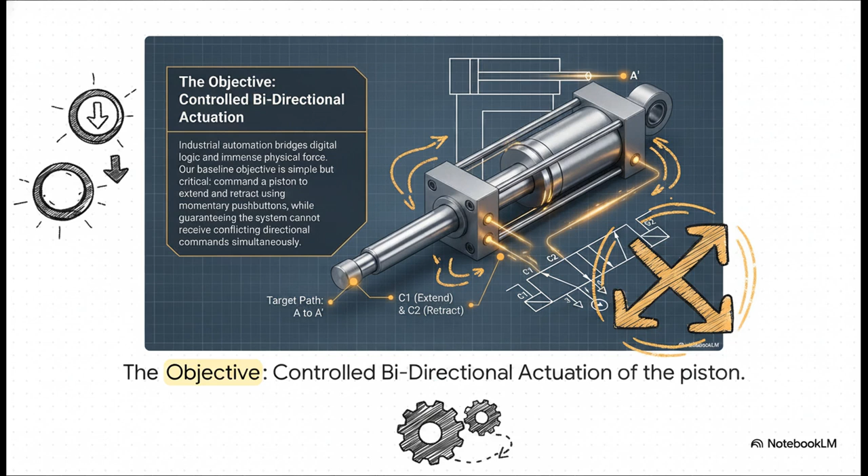Okay, let's dive right into our baseline objective. We need to command this massive metal piston to extend and retract safely from point A to a target, let's call it A'. Now the catch here is that we're using momentary push buttons. That means they only actually send a signal while your finger is physically pressing them down. And crucially, we have to absolutely guarantee that this system cannot possibly receive conflicting directional commands at the same time. I mean, if it tells the piston to push and pull simultaneously, yeah, things break. Badly.

So to actually move that heavy piston, we're going to need some serious industrial muscle. This usually means choosing between two different forms of fluid power. On one side, we've got hydraulic power. That's using thick, incompressible oil for extreme heavy lifting. And on the other side, we have pneumatic power, using pressurized gas or air for rapid, really high-speed cycling.

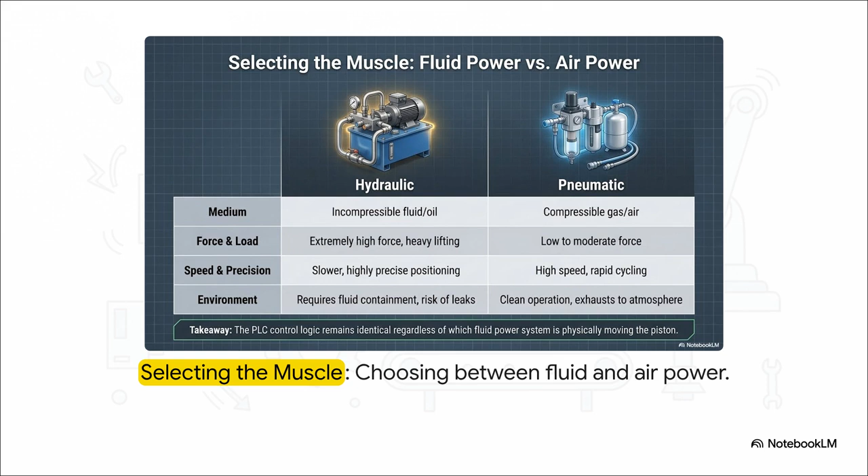Now here's what's actually really fascinating about this setup. We have these major physical differences, right? Hydraulics are slow, they can be messy, but they are insanely strong. Pneumatics are super fast, clean, but definitely weaker. Yet, despite all these extreme physical differences in force and speed, the underlying digital control logic, the brain we're about to build, is going to remain exactly the same regardless of which muscle we actually choose.

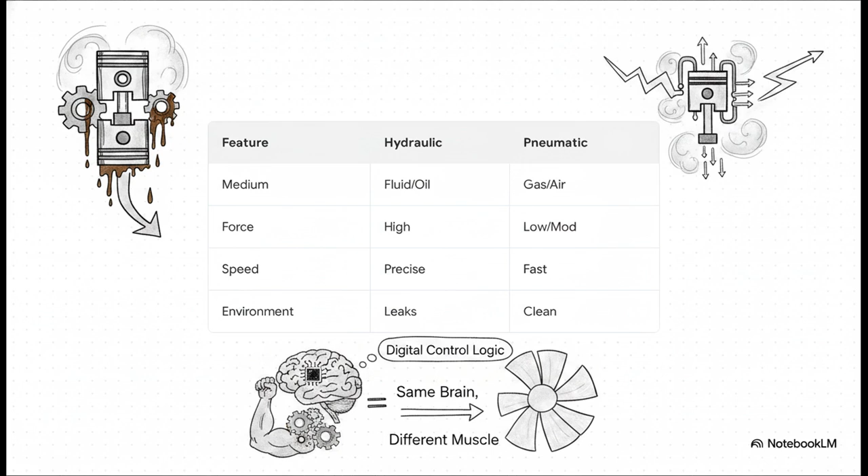But before we start flexing that industrial muscle, we have to build a safe nervous system. We really need to cleanly separate the electrical layers here. On the input side, human operators are interacting with a nice, safe, low-voltage 24-volt current. But the mechanical actuators require much heavier power to run. So the PLC, our programmable logic controller, sitting right in the middle, acts as this absolute barrier between the two. This is so vital because it shields our delicate digital brain from the high-voltage electrical kickback that inevitably happens when massive machines power down.

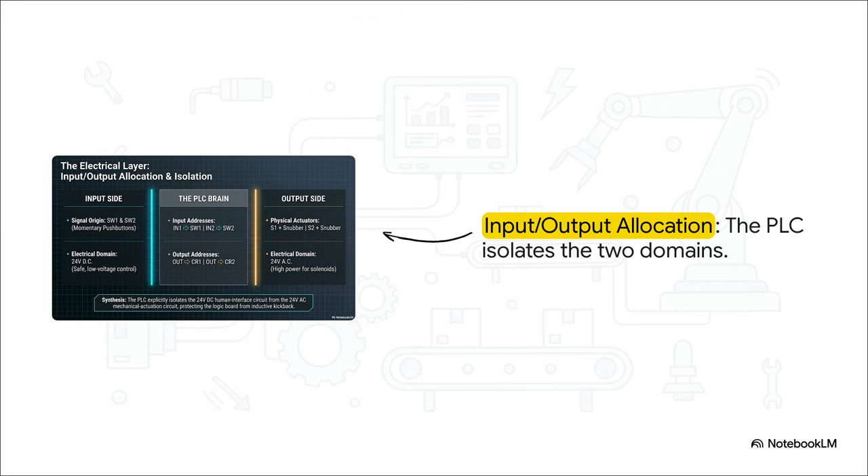So how exactly do we cross that gap? Well, we build a mechanical bridge using a 5/2 directional control valve. You can think of this valve as basically the ultimate translator between the digital world and the physical fluid world. On either end of it, there are these solenoids, which are essentially electromechanical triggers. They take that isolated, tiny digital whisper from our controller and they use it to unleash real physical movement.

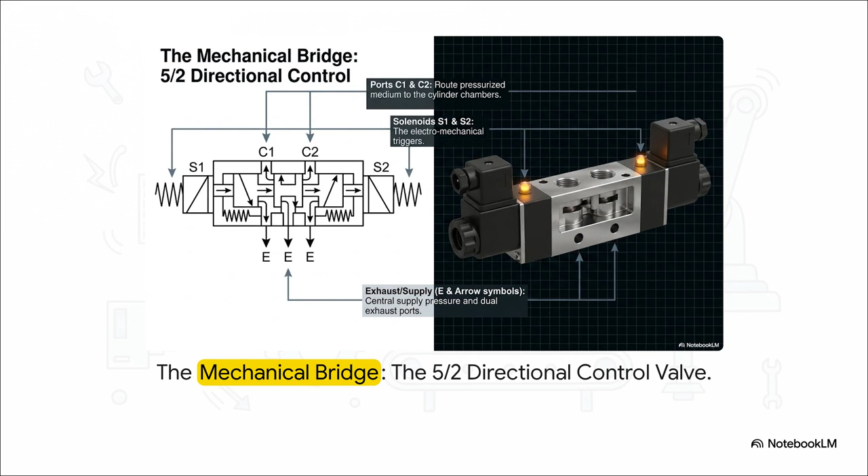Let's peek inside that metal block and witness what's called the spool shift. When one of those solenoids is energized with a current, it instantly creates a magnetic field. That invisible force then physically pulls an internal metal spool. And here's the crazy part. Just by moving that spool a tiny fraction of an inch, high-pressure fluid is instantly redirected, forcing the entire cylinder to move. We've successfully turned a super low-power electrical signal into immense mechanical action.

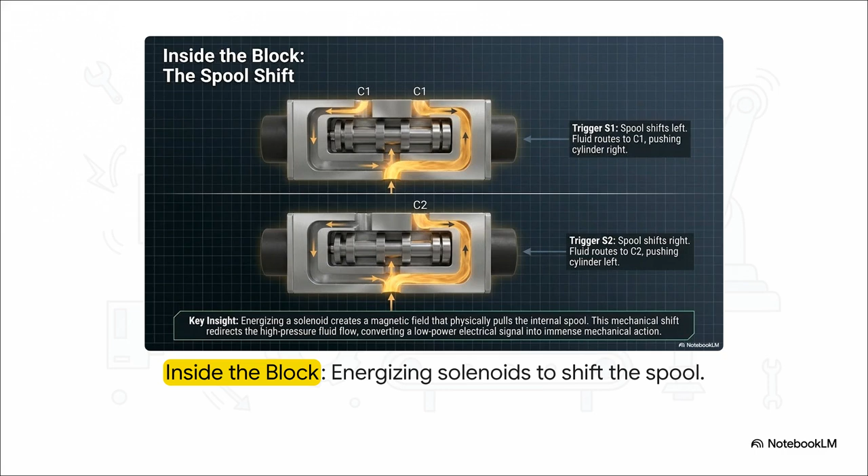Okay, so we've got our mechanical bridge and our fluid muscle perfectly set up. But here's the terrifying question we still have to answer. What happens if an operator panics, or slips, or just makes a really dumb mistake and presses the extend and retract buttons at the exact same time? Because with massive industrial pressures at play here, a conflicting signal could literally tear the machinery apart.

To keep our machine from literally destroying itself, we rely on the system's brain. And this brain is programmed using a specialized visual software architecture known as ladder logic.

It's called ladder logic because, well, it literally looks like a ladder. It's got these vertical power rails and horizontal rungs of code. But this code doesn't just passively read inputs. It isolates them, it quote-unquote remembers them, and most importantly, it uses mathematical interlocks to absolutely lock out those conflicting physical movements we were just talking about.

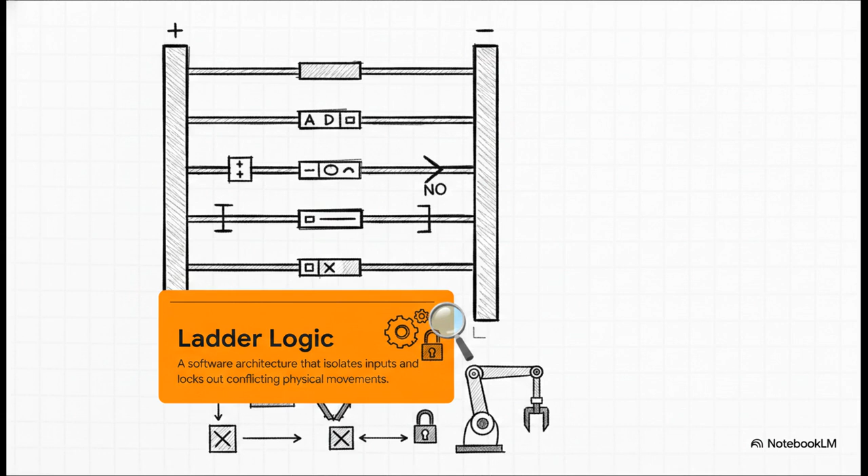Now this digital brain has a very specific puzzle it has to solve. Because our push buttons are momentary, the system has to somehow remember the command to extend long after the operator's finger actually leaves the button. And while it's remembering that command, it has to simultaneously guarantee that the opposite command is strictly locked out. We pull this off through two really vital code patterns.

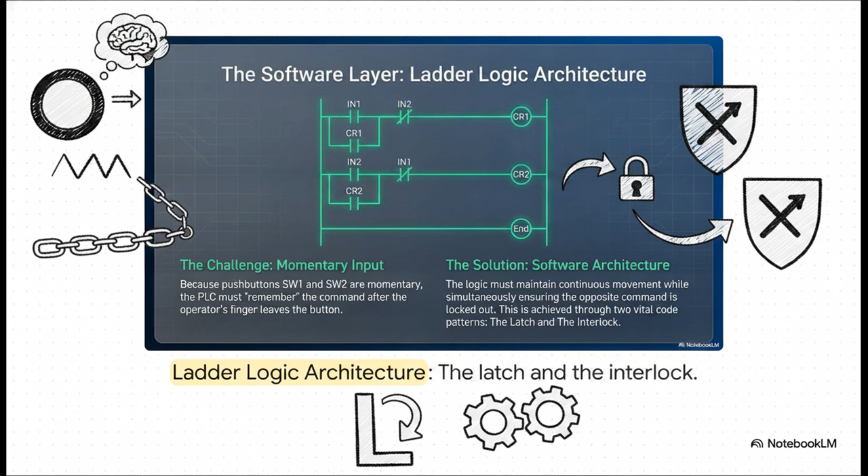Which brings us to our first brilliant solution, the latch. So when the operator presses the button, the signal reaches the output coil. Now here's where the magic happens. That output instantly closes its own parallel circuit, creating an OR gate. So now, when the operator releases the physical button, it doesn't even matter. The signal just bypasses it and flows right through the new path. The system has created a continuous loop. It has successfully remembered to keep pushing.

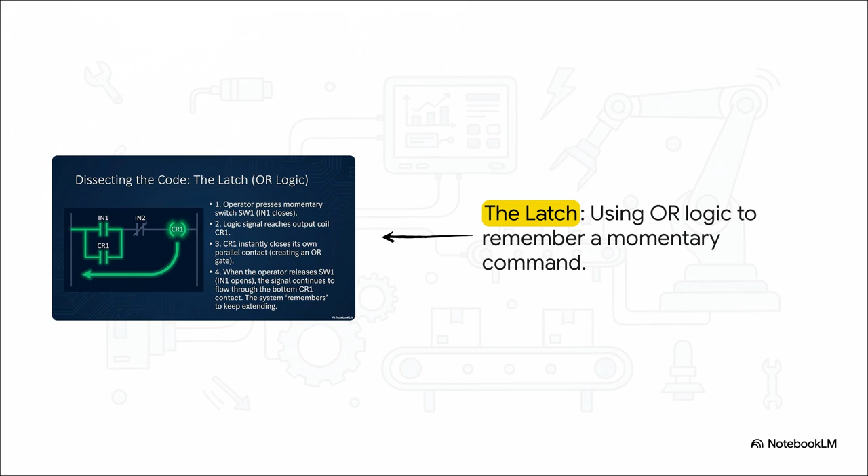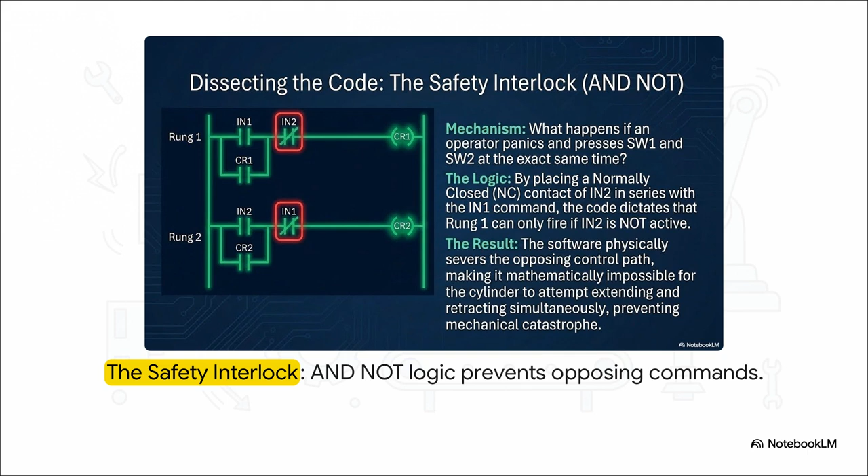Right. But what about our panicking operator from earlier? To completely avert a mechanical catastrophe, we deploy a safety interlock. We take a normally closed contact of the retract button and place it directly in the path of the extend command. This creates an AND NOT logic gate. By weaving the opposite buttons directly into each other's paths like this, we mathematically sever the opposing control line. The cylinder physically cannot tear itself apart, even if someone is literally mashing both buttons.

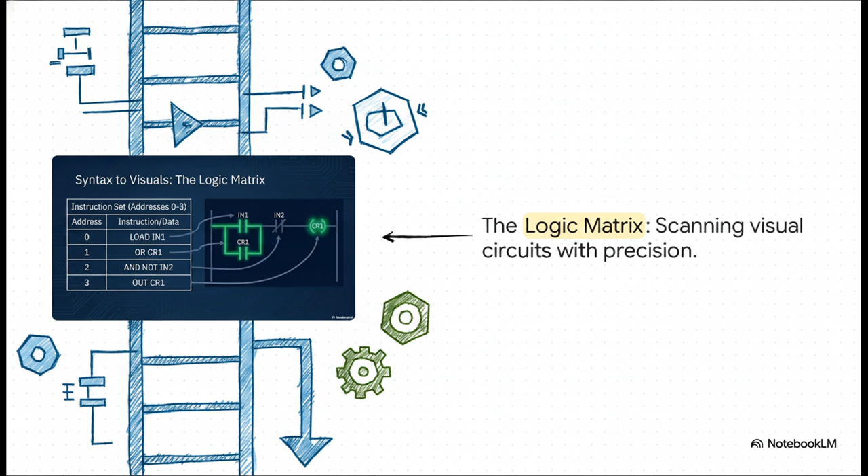Now, while we humans visualize this all as a nice ladder, the controller systematically reads these circuits as a high-speed logic matrix. It's processing this rapid-fire instruction set, loading the inputs, evaluating those OR and NOT conditions, and then executing the safe outputs. It scans this list from top to bottom over and over again, thousands of times a second, with absolute, unyielding precision. All right, let's watch this entire sequence rapidly come alive.

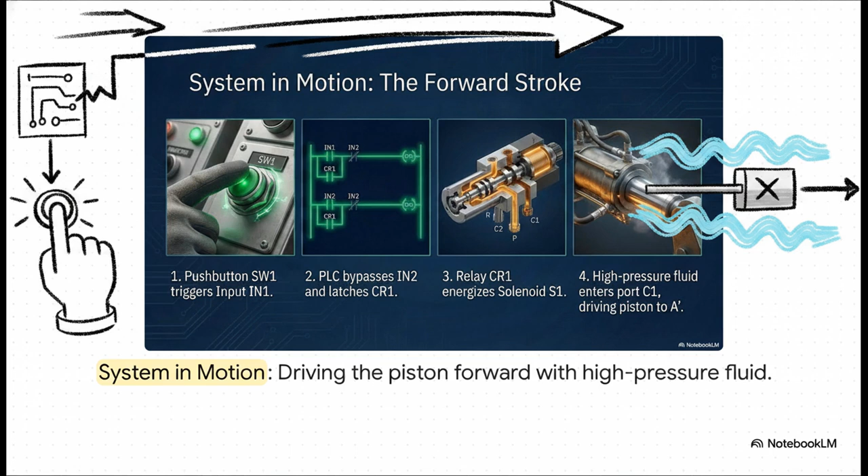Step 1, the human finger pushes the button, triggering that safe low-voltage input. Step 2, inside the digital brain, the PLC bypasses the interlock and latches the relay. Step 3, that relay sends a high-voltage signal right across the mechanical bridge to energize the solenoid. And finally, step 4, the spool shifts and high-pressure fluid aggressively drives that heavy piston forward to its target. Boom.

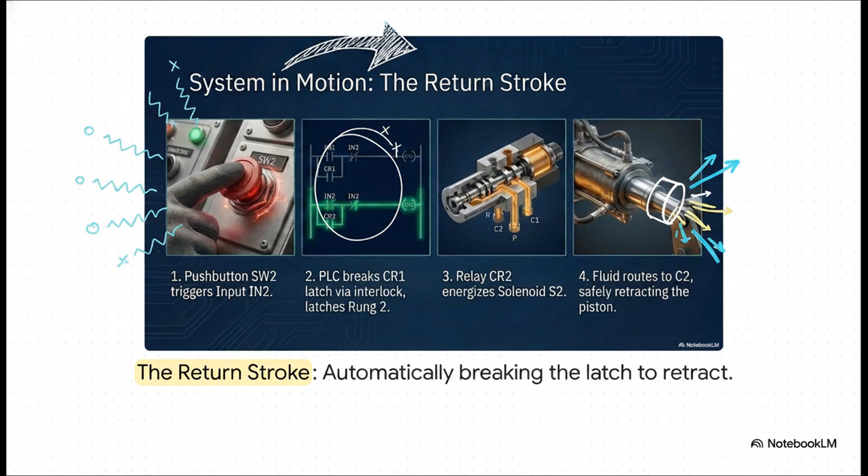And the return journey, honestly, it's just as elegant. Almost instantly upon hitting that second button, the PLC software interlock automatically breaks the previous latch we just made. At the exact same time, it latches the second rung, energizes the opposing solenoid, shifts the spool back, and seamlessly routes the fluid to safely retract the piston. It is quite literally a perfectly choreographed dance of electricity, logic, and fluid dynamics.

When you take a step back and look at this complete architecture, you really start to see the true genius of industrial automation. The whole thing relies on deliberate decoupling. By explicitly isolating those fragile human inputs, deploying these highly intelligent software interlocks that completely outsmart human error, and shielding the digital brain from high-voltage brute force, we engineer systems that are incredibly safe, remarkably durable, and infinitely repeatable.

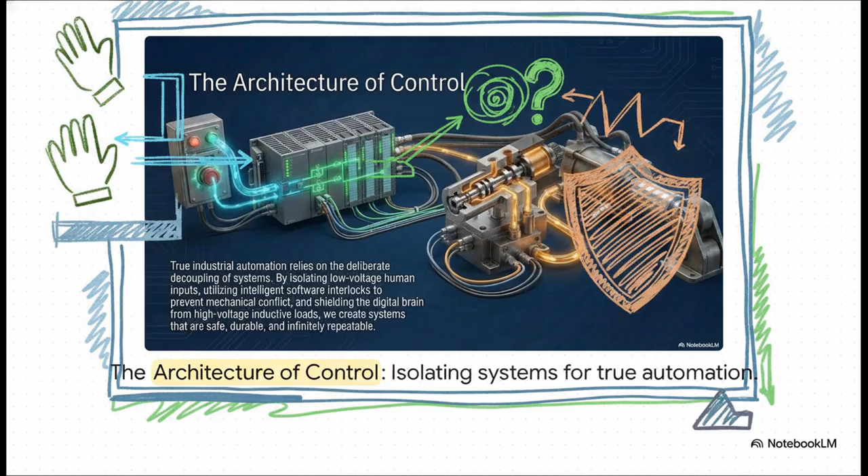The crazy thing is, this exact same architecture scales up to run entire factories, power plants, and assembly lines all across the globe. So as we wrap up this explainer today, I want you to look around your own environment and just ask yourself, where else in your world are invisible digital brains hiding behind massive physical power? The logic we just explored together is everywhere, just waiting for you to notice it.